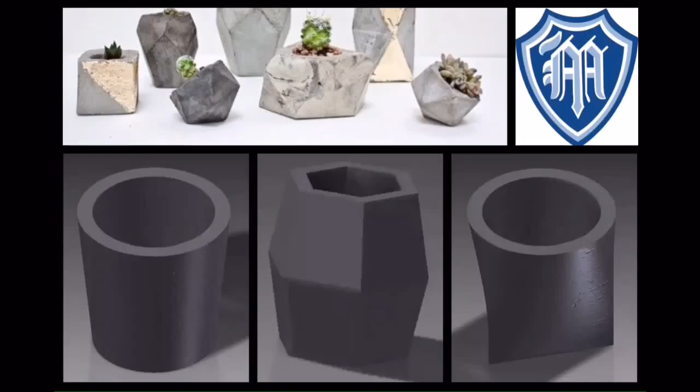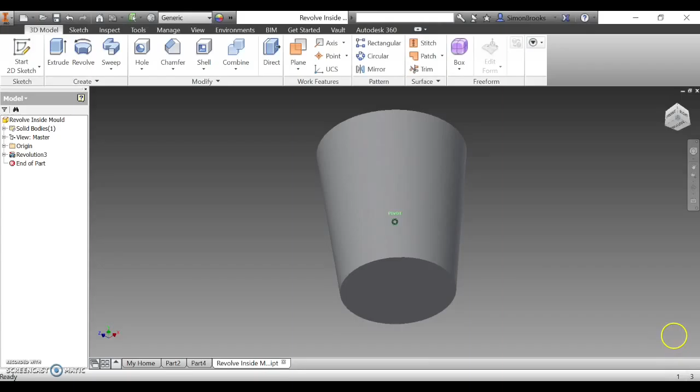Now that we've created the inside mould for our concrete succulent pot, what we need to do is to create some holes in the bottom of this so that they can be located onto our form ply base. The reason for that is because this doesn't have the luxury of having those screw holes that we put into the outside moulds, so otherwise it'd just be floating in midair and would be quite difficult to locate.

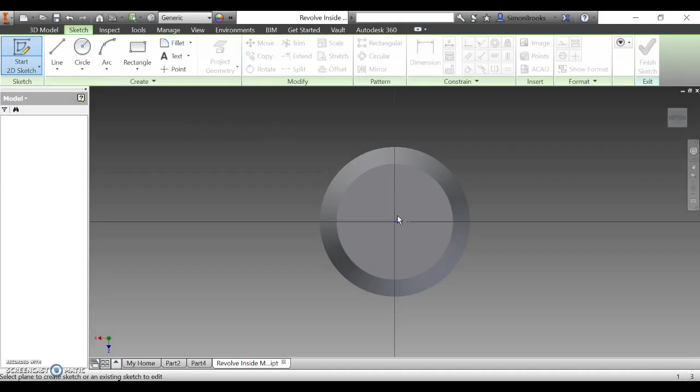So to do these holes on the bottom, what we're going to do is just create a sketch on that surface. So create a sketch, and we're going to use 2 holes, because depending on the shape, especially if you've got a geometric type shape, we need to have them located in a certain way so that it doesn't spin around. We're going to be using some 6mm dowel as our locators.

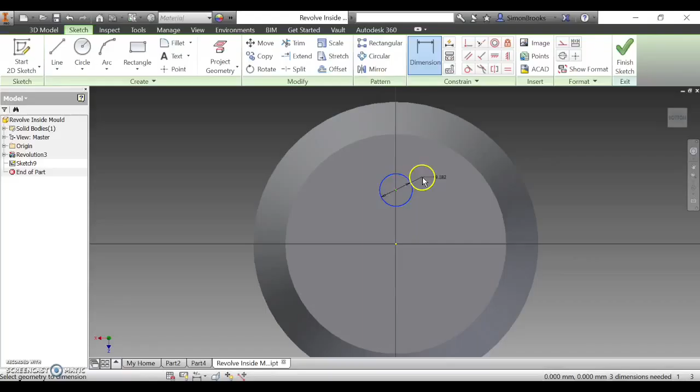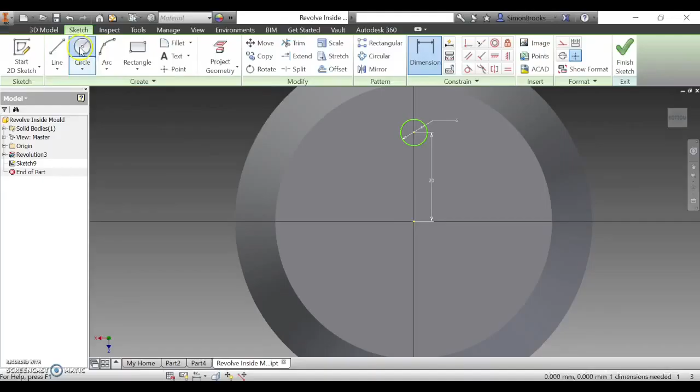So what you can do is make that a 6mm hole, and also try and make it as wide as possible. So for example, let's dimension the center of the circle to the origin. Let's make that 20mm and see how that sends it out that way. So quite close to the edge, and now we'll do the exact same on the other side. Now you could use a mirror tool in this instance, but what we'll just do is dimension them out so that they're exactly the same.

Now one little trick you can use when you're trying to use equal distances: rather than typing the dimension in here, what I'm going to do is select the existing dimension and hit the tick just there. So for example, if I do change my mind and I want to make that 15mm, it'll bring the other circle with it. So that's a good little trick that just saves you a little bit of time if you're trying to do some editing. So I'll take it back to 20 and then finish the sketch.

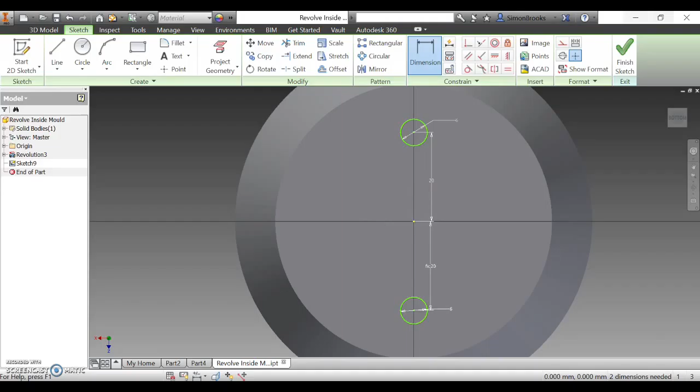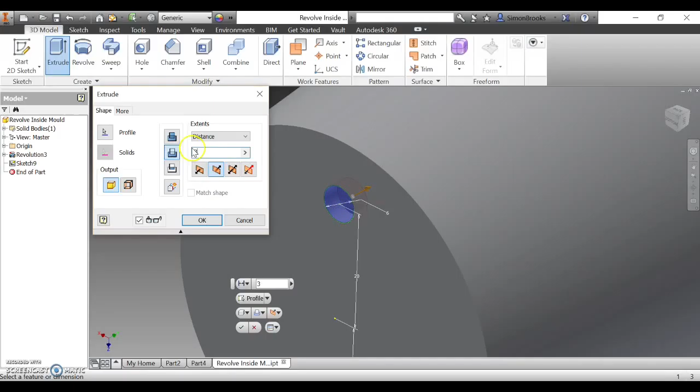And now we're going to extrude those holes back and cut out the hole. Now reminder that that thickness is only 3mm, so it only has to be 3, but 10 is fine, so just cut them through, and now you'll see that they have cut all the way through.

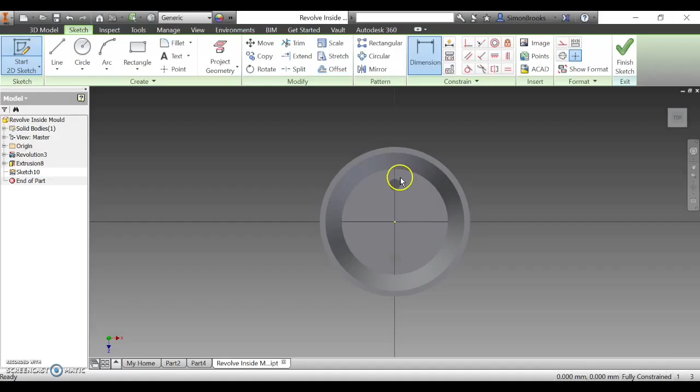Now to make sure that those dowels are fully supported, what we're going to do is just spin this around the other direction, and we're just going to add a little bit of extra support. So we're just going to draw pretty much exactly what we did on the bottom. We're just going to make the circle slightly bigger, and we're just going to extrude up some little supports for that.

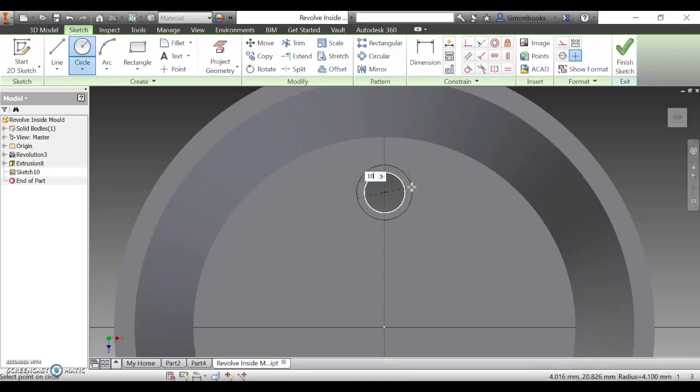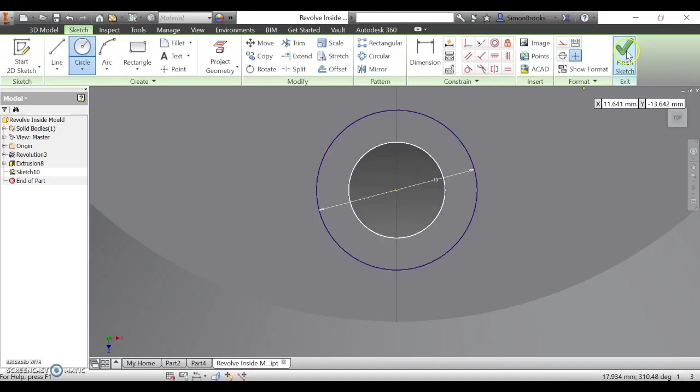So we've done a 6mm dowel. What we can do for this circle is to make it 10mm in diameter. So the wall thickness of that will be 2mm either side, and do the same down the bottom. So again, hovering over our circle just to try and get the center, like so. Bring it out, type in your 10mm, and then now that's ready to extrude up. So I'll just bring it over this way so you can sort of see it.

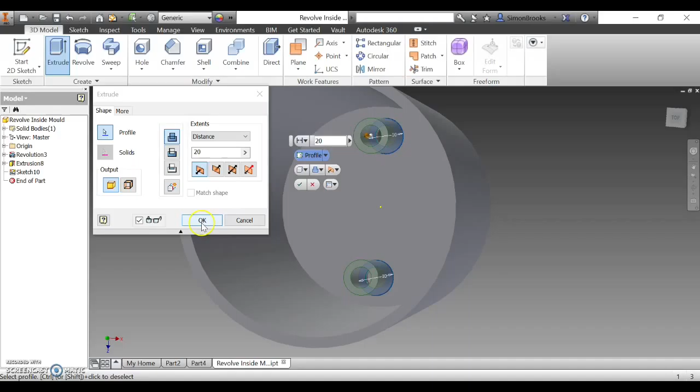Now hit the extrude. Now this could depend on what you're doing, but I think for this example we'll just do 20mm, and that will be enough to support it. The dowels will be a lot longer than those will be, but just to keep the inside mould nice and straight. I suppose the more you can afford as far as plastic for your model, the higher you can make these, but 20mm will be fine. So that, guys, is pretty much your inside mould finished.